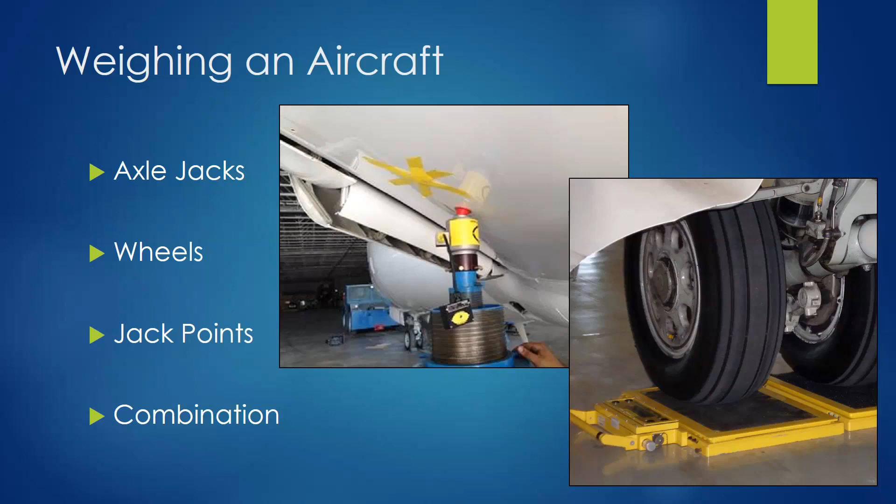So how do we do this? A very simple CG calculation is, at minimum, we have to have two points, right? We have to have two different points in order to calculate the center of gravity between those two points - hopefully it's between the two points. So we have a minimum of two scales on aircraft because they tend to be, viewed from above, fairly triangular in nature. We often have three jack points, but two of them are in line with each other. The two wing points are almost always in line with one another, and so left-hand and right-hand main landing gear or wings make up the rear point.

The nose, which can be fuselage or nose landing gear - or on some aircraft, instead of the nose, they have a tail-heavy setup where you put the third scale onto the tail. The aircraft has to be level so that weight is spread evenly, because the idea is that the plane should be pretty much level in flight.

To find our total weight, that's simple - we just add them together. So here, if we had two scales, a nose or front scale and say a wing scale or main landing gear scale, we have 650 pounds total. So total weight is just adding the scales together. Most of your scales, like the one we saw, or the one we'll use in class, you plug three scales in simultaneously and it gives you the weight on this scale, the weight on the second scale, and the weight on the third scale, and then it also gives you a readout for the total - it adds them for you.

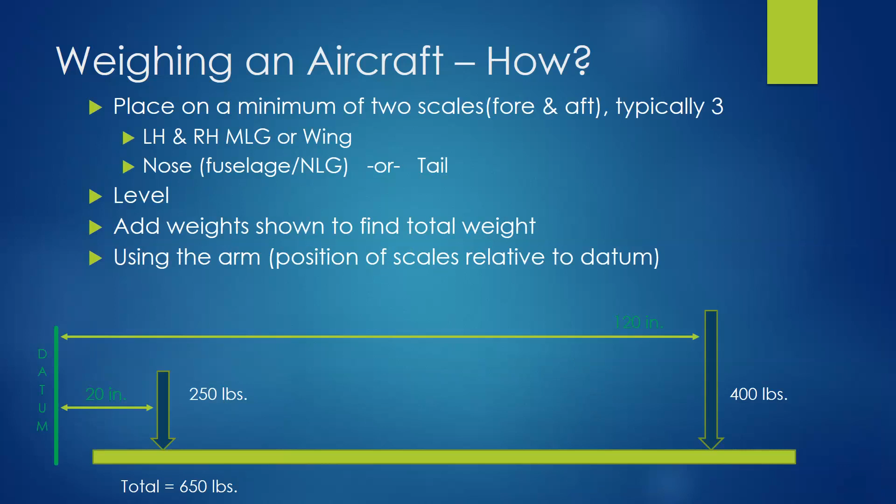Then we have to use the arm position of the scales relative to the datum. In my example here, I drew a datum, and we're going to say this front scale is 20 inches back from the datum. So is this a positive or a negative arm? Positive, because it's behind the datum. Then we'll call that main landing gear at 400 pounds, 120 inches after the datum, so also a positive arm.

And so we calculate the moment for each one. The forward one, 20 times 250, gives us 5,000 inch-pounds - pound inches. 120 times 400 gives us 48,000 pound inches.

And we combine those to get the CG. The way we do that is we add our two moments together, 5,000 plus 48,000, and we divide it by the total weight of 650, which gives us a CG of 81.5 inches.

So if we lifted this beam up at that point, in theory, it would balance. It would be a balanced teeter-totter. It's kind of like you got the big kid on one side and the little kid on the other. Normally they don't balance, but if the little kid sits further away, you could make them balance. And that's what we got going on here. That's a really big couple of kids, though.

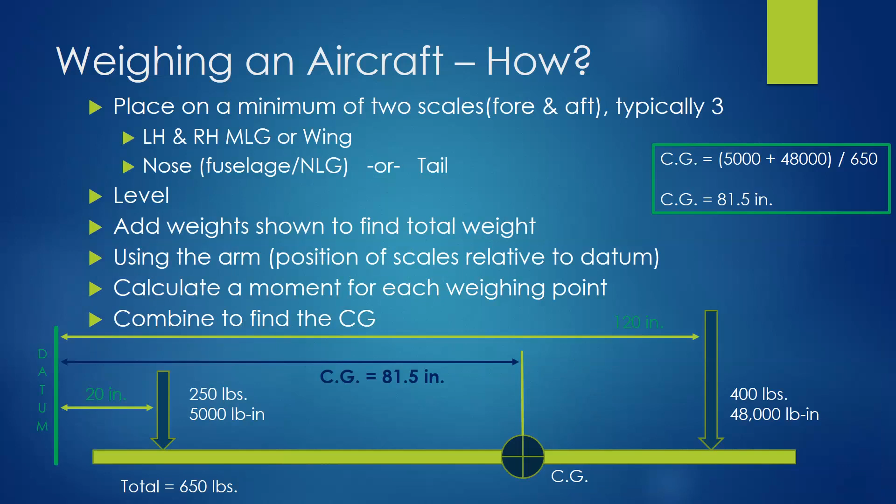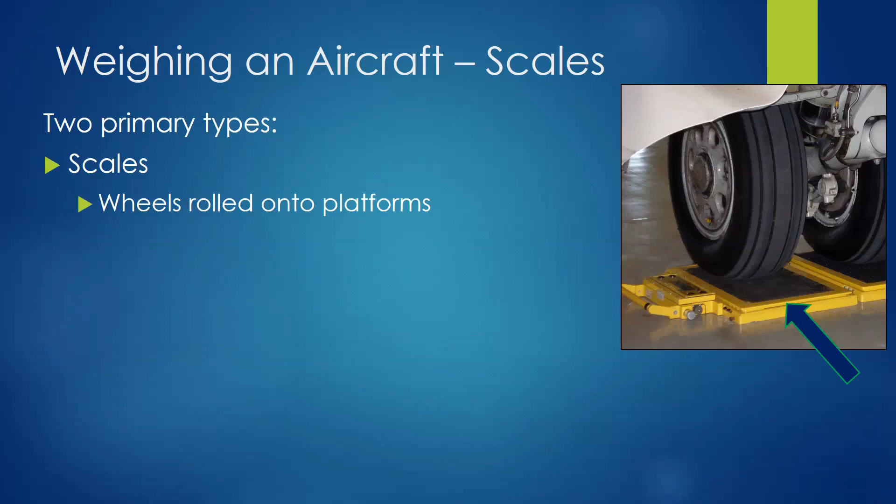So the two primary types we'll see in industry are scales, where we roll onto the platform, and load cells. Load cells are used between the top of a jack and the jack point. In this case, it's a removable jack point - you can see this red-orange piece screws into the fuselage. On our King Air, it has jack points, they're fixed. You'll see these little nubby things sticking out when you do gear stuff on it. But under normal operation, the jack just contacts that directly.

When you're weighing it, you put this load cell between the top of the jack, and these are extremely sensitive. The ones we had would go to about half a pound. When you're lifting an airplane totaling 60,000, 80,000, 100,000 pounds, a half a pound is pretty precise for one of these cells.

We have to subtract out that tare weight. We talked about it earlier when we looked at the weight and balance record and the pilot operating handbook, where we subtracted out the chocks in that case.

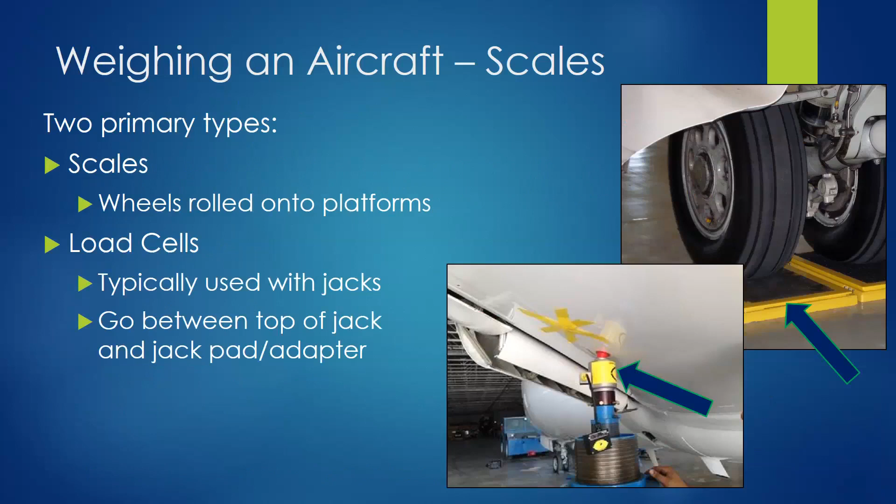But items that may have to be taken out include support equipment used during jacking, so the jack pads - in the case of this, it's that orange thing that's screwed into the side of the fuselage. You'll know how much those weigh, and you have to subtract that out.

Jacks themselves - sometimes depending on how the jack is configured, a portion of the jack weight is included. Any kind of balance weights, so is it the Baron? You have to put the tail weights on it when you're doing weight and balance, something like that. We haven't done the Baron, but there's some airplanes where you lift it at the wings, and instead of lifting the nose, you put a bunch of weight on the tail and teeter-totter it on the mains. It's kind of a goofy setup, and so you would have to subtract those balance weights.

Chocks, gear pins - when we weigh bigger airplanes, you can pin the gear in the down and lock position, and you would have to remove those. Sandbags, ballast bags, etc., so they have to be subtracted at the end, both out of the weight, and you have to go through the process of subtracting from the CG.

And it's not a straight process of CG of those, CG of the airplane minus CG of those. You cannot add or subtract CGs. You cannot add or subtract the moment arm, okay? You can add and subtract weights, you can add and subtract the moments, but you cannot add and subtract arms directly.

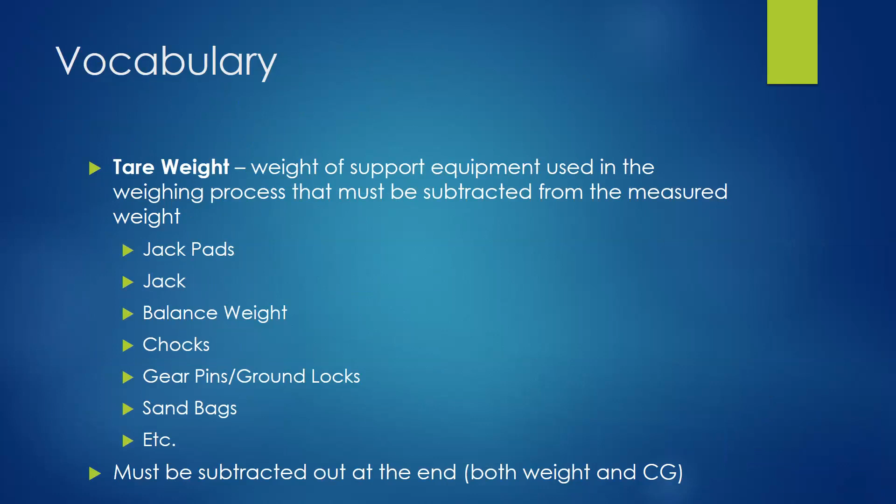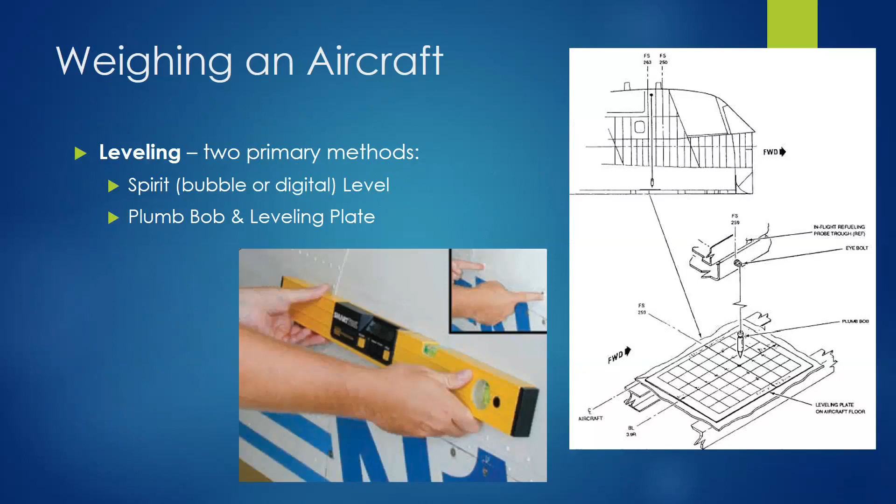The leveling - we talked about different areas, whether you use a Spirit level, which also includes your digital type level. Spirit level is a bubble or a digital level. And then plumb bobs and leveling plates like we've seen on the 727.

And then we get to that engine oil discussion - do we include it or do we not? So remember, before 1978, Civil Air Regulations Part 3, engine oil would not be included. If your engine oil is full, you can subtract it out, because typically you know the CG and you know the volume of oil, or you can drain the engine. Your choice - it's probably easier just to fill it full and subtract it out.

Newer aircraft since 1978, full oil is included. Most of the time you're going to top it off to the full mark, and that's where you're going to have it when you do your weight and balance. If for some reason you have a totally empty engine, then you would need to add that weight of the oil back in, and you would need to make the calculations to adjust the CG based on that oil being added back in.

There's additional information in AC 43.13-1B, Chapter 10, and in the TCDS. So other fluids - fuel is only the residual fuels included. Okay, that's unusable, undrainable fuel.

What if there's fuel on board the aircraft? What do you do?

Do you know exactly where the CG and the weight of the fuel is? One option is to drain it. What's another potential option? Burn it. Go out and run. What else?

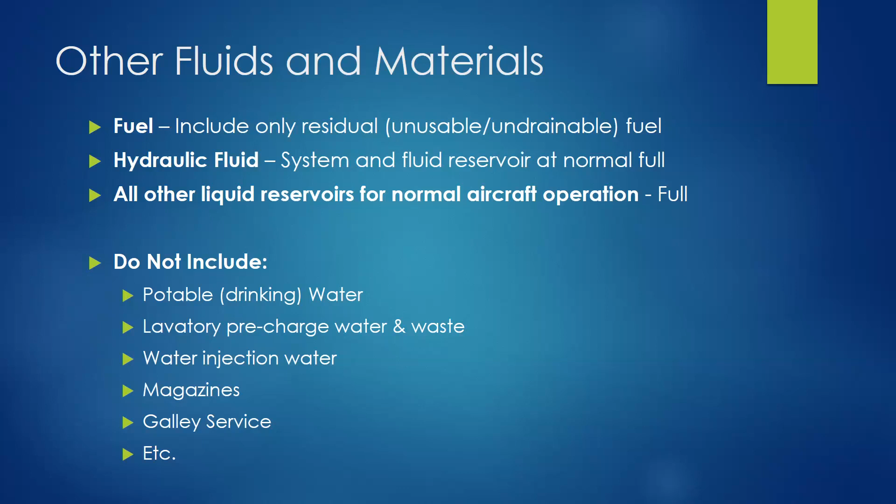They are considered operational equipment, safety equipment that has to be on the aircraft. Now you go in and you find like 5 in this pocket, 1 in that pocket, and none in this entire row because for some reason people treat them like trading cards and hand them around. Most people don't even look at them, but yet they move. Passengers are a pain if you haven't figured it out yet—they do dumb things.

So back to our 182. This one was certified in 1971. It was built in 1974. That means it was prior to 1978, so we would treat this as a Car 3 aircraft.

So what do we have to do with oil when we do weight and balance on our 182? You need to drain it, or you have to subtract it—drain or subtract, it's not part of your empty weight. The other thing is this aircraft has 30 pounds of unusable fuel. We do include unusable fuel. That's that low spot in the bottom of the tank where we can't pull the fuel from. That is included.

So if you have a totally dry tank, you would have to add that back in. Most of the time, if you empty the tank, you don't have a way to get that out unless you pick the airplane up and dump it out, or you sit there and suck it out with a fluid transfer. So the certificate of empty weight must include unusable fuel, 30 pounds at 46 inches—they give you a weight and an arm.

I should go back. In this case, they say undrainable oil of 0. Now that's it—any undrainable oil would be included in the weight. But on this aircraft, you can drain all the oil, and so you would remove the full weight of the oil. They give you that information elsewhere, further down. So we do include our unusable fuel.

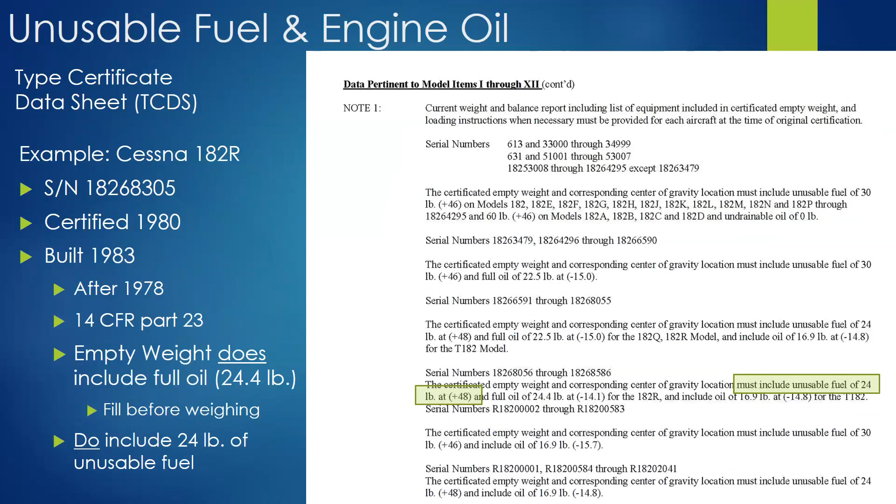So how do we calculate this? Once we have these weights, we have to do something with them. Weights we can add and subtract. To get the CG, there's two primary methods. I'm partial to the second method, but you draw your own conclusion as we go along.

So the first is empty weight CG formulas, and these are fun because there's different formulas for different aircraft styles. There's 4 of them. Or we can use a table. For the table, it doesn't matter what style aircraft you're using.

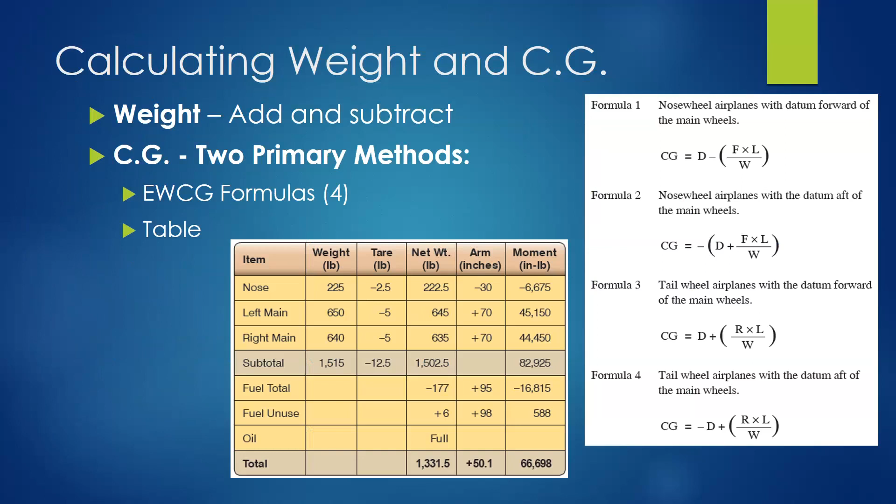So the 4 formulas for our 4 cases: a nose wheel tricycle gear aircraft can have a datum forward of the main wheels, or it can have a datum aft of the main wheels. And a tail wheel, tail dragger aircraft — it's a conventional gear aircraft, even though we don't see them as often today. They were the first type of airplanes. Datum forward of the main wheels, datum aft, okay? So those are the 4.

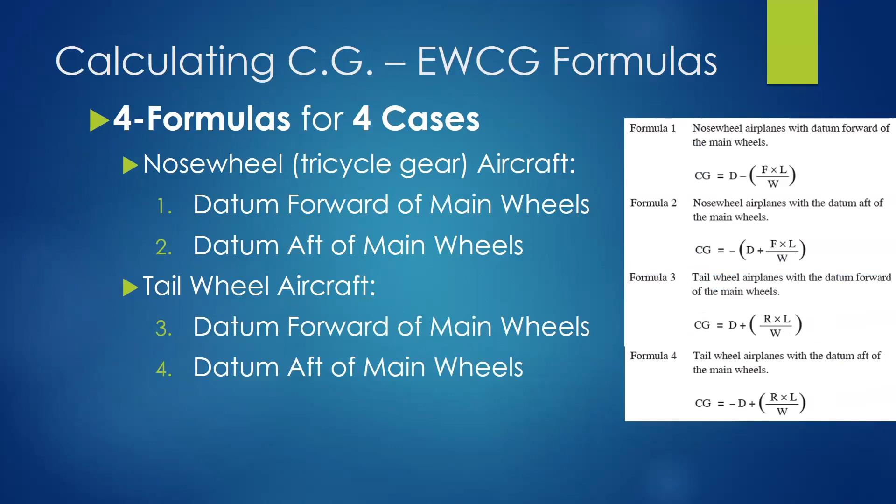You don't need to, you can write your equations down. This is directly copied from a page out of the 4313, chapter 10. 4313, 1B, chapter 10 covers weight and balance. So if you have your 4313, it's in there. If you have your mechanics handbook, these equations are in there.

The variables: CG, that's what we're trying to figure out. Positive is behind the datum, negative is in front of it. W is the total weight. D is the horizontal distance, and this is where people really get screwed up — the horizontal distance from the datum to a main wheel weighing point. Not an arm, always positive.

Even if the main wheels, like in a tail dragger conventional gear, are in front of the datum, when you're making that measurement it would be a negative arm. It is a positive distance D. So don't let that screw you up. The arm is positive or negative. All the rest of your measurements are not — you're purely working with positive numbers.

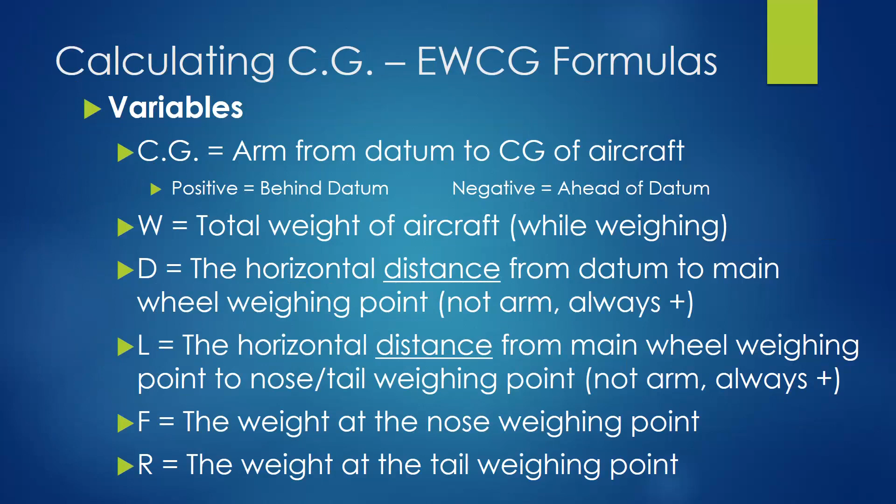L is the distance from the main wheels to the nose wheel or to the tail wheel, depending on the aircraft type. Again, it is always positive — it is not an arm, it is purely the distance between the 2 sets of wheels. F is the weight at the nose weighing point, if it's a tricycle gear aircraft. R is the weight of the tail weighing point in a conventional tail dragger aircraft.

So if we apply them, here is that first one. Here we have a nose wheel aircraft, datum aft of the main wheel, and I've got what our different variables are. But what we're going to do is perform a quick calculation to figure out what the CG of this aircraft is, and as part of that we're going to draw a sketch of it, because you're going to do this on your lab.

So when I say draw a sketch of it — here's the nose wheel, here's the main wheel, I hear the giggling, here is the datum.

Okay, can you guys see that okay? Is that... God, yeah, these boards are ridiculous.

We have our D, so our nose landing gear is 375 pounds. Our main landing gear is 1,050 plus 1,025, okay, or 2,075, okay?

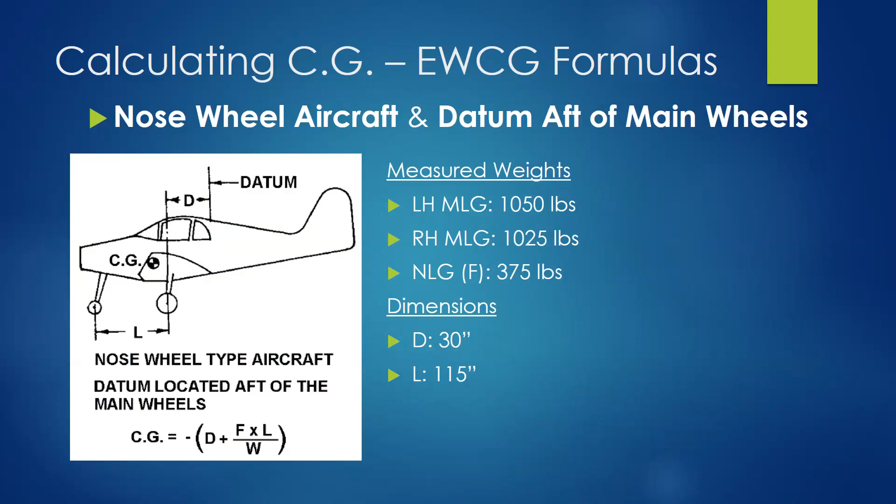And if we plug all this in and we draw a sketch, it looks something like this. So here's our datum on the right behind the main landing gear, 30 inches behind D. The L is still 115 between them. Now you can see when we put it all together, our CG is negative 47.6.

Remember, because this has that negative in front of it, and these are all positive numbers inside the parentheses, we end up with a negative arm. And that makes sense, right? Our datum's here, our CG typically has to be between our wheels. If you do the calculations and your CG falls outside of the area between the two wheels, that should be a big red flag.

What would happen if the CG was behind the mains on a tricycle gear? Our tail would smash into the ground, right? It would teeter-totter into the ground. These are posted on e-learning exactly like this, if you don't want to.

Okay, so if it was in front of the nose landing gear, what would happen? Maybe it would tip up, but probably not tip up, but it'd be really hard to get that nose off the ground. Plane would be going down the runway doing this. Right? Bounce with me, bounce with me. Right?

I'm really cool, my kids think so. My 10-year-old won't even, she's like, drop me off way back there, Dad. But I'm going to take you to the front door of your school. No, drop me off back here. What's that? Except that's my wife, I drive the Explorer with the rusty liftgate. She didn't want that. I'm just waiting for truck prices to come back down, but I feel like they're not going to.

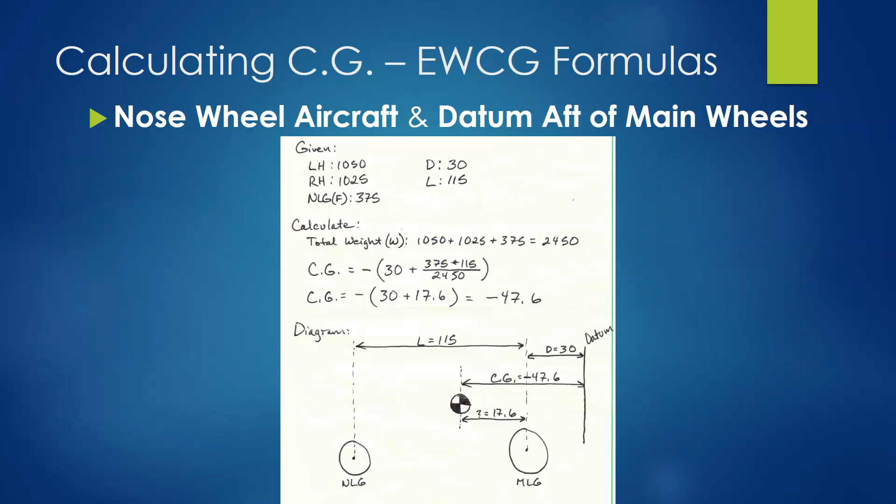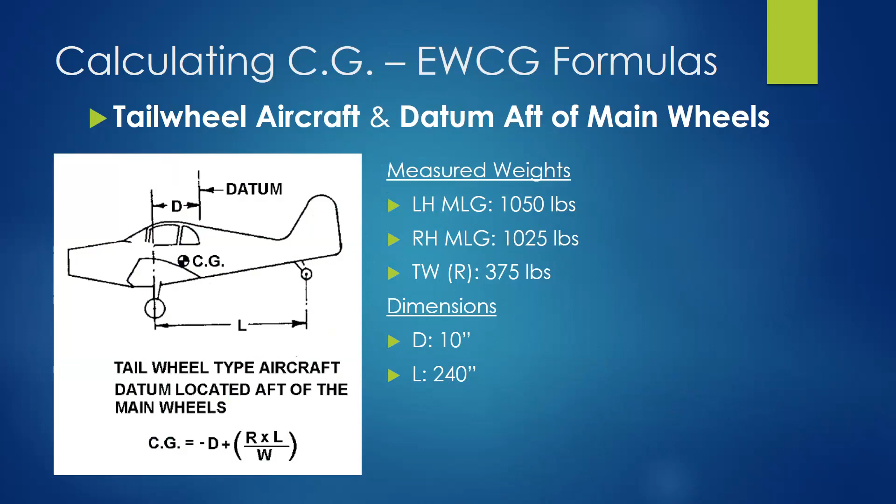Here is the same aircraft now, but the datum is behind the mains. If you were to overlay these on top of one another, use the same weights, the same distances here - the length is the same, I just moved the datum, so that's got a different distance. It's 10 inches now behind the main wheels. If you overlay these, they are basically the same aircraft with the datum in two different locations, and they will end up in the same spot.

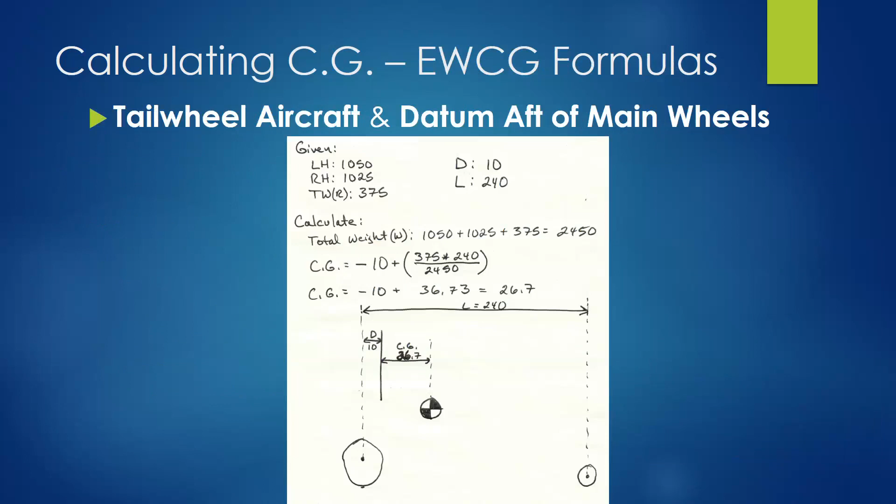So, who likes knowing 4 different equations for 4 different aircraft types? You have to learn this method, but it's not my favorite. Here's what I prefer - I like the table method. That's the next thing we've got. So the table method, gear type, and datum location are basically irrelevant. But there is a big caveat to this one that students always get screwed up on.

That is, you can add the weights together, you can add the moments together, but you can never add the arms together. Stay with me - you can add the weights, you can add the moments, you cannot add the arms. Thank you. Nobody add the arms. I guarantee somebody will - someone will do it on the homework, someone will do it on the final exam. Yes, I said final exam, there is one for this class.

We'll show how to do that. Okay, so you need to know the weights and the weighing points - again, it could be gear, it could be jack points, it doesn't matter as long as we know what the weights are and how far they are from the datum, the arms. Arm is the distance from the datum to the weight point. Again, positive is behind the datum, negative is ahead of the datum in relation to the aircraft.

So if our datum is at the firewall, what kind of things would be positive? What kind of loads? The cabin, items in the cabin, main landing gear probably would be, the flaps would be. What's carried behind there that's variable - the people, the fuel, baggage, okay? This is like a Cessna and that kind of thing. The firewalls on the airplanes I worked on were way at the back - ours was out in front of the nose.

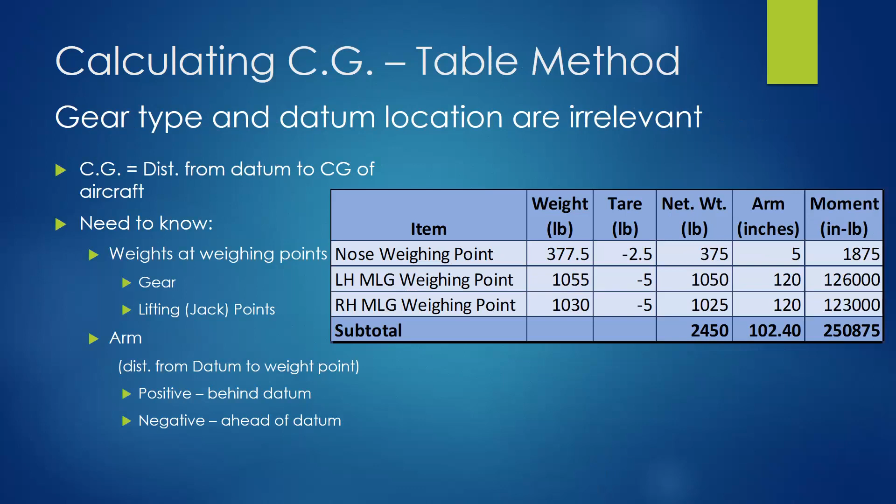We can take our table and now we can add additional items to it to track modification repair. You can see how this looks a lot like the empty weight calculation in the pilot operating handbook, and now we're adding modification data to it. So Western over at the engineering college used to have, I don't know if they still do, they had a

modified Cessna 172. It was experimental. And what they'd done with it, they used it for the aeronautical engineering program, which Western has a really good aeronautical engineering program. If you think about switching to engineering, it's actually very highly accredited, by the way. But they removed the rear bench seat,

and so you would take the weight, and where did I get this weight and arm for my rear bench seat? Where'd that come from? The equipment list - comprehensive equipment list, very good. That would be in the pilot operating handbook or the aircraft flight manual. And they installed a test equipment rack.

It's experimental. They had to do their own figuring out of that thing, I'm sure. I'm sure they were real precise on it too, based on the operations I saw going on with that airplane. So when I saw them operating it, they were looking at icing. They basically would build fake ice shapes and attach them to the wing and then go fly the airplane. And they'd have yarn stuck all over it so they could see the yarn lifting up when it started to stall in different areas. Nothing like attaching unknown shapes to your wing and going and flying the airplane and stalling it, right?

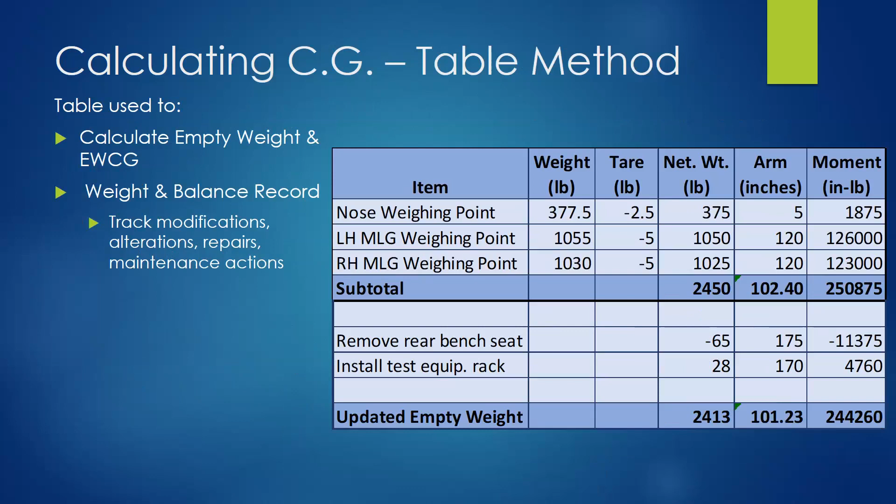They would then do additional calculations to load the airplane for flight. So this is what the pilots do. This is the next step, and they do the exact same thing. Here they've got their different fuel. They add in unusable or take out unusable fuel because we include unusable fuel, right? But then they're going to add back in full fuel, which includes adding that unusable fuel back in. It seems kind of counterintuitive, but they have us keep unusable fuel in, and then the pilots have to subtract it out, and then they add in full fuel, for instance.

The pilot, baggage. Oh, now they've added some test equipment in our rack here. Slot in maybe at that time, that 47 pounds is probably like a VCR, and maybe if it was 1980s era, it'd be a VCR, and that'd be it.

So there's the flight load, the full weight. This is where it's important that we get our empty weight correct, because now they're going to take this plane out and fly, and we don't want to kill anybody.

They can figure out their moment, and they can figure out where their new CG is. You can see it's moved back a little bit. That makes sense, because everything they've added here, for the most part, fuel, that's behind the firewall. The pilot is behind the firewall, baggage is behind the firewall, the test equipment, right? That all added to it, so it moved our CG further back. But we want to make sure it's not so far back that the airplane is going to want to do one of these, or that it'll go into a spin and they won't be able to recover.

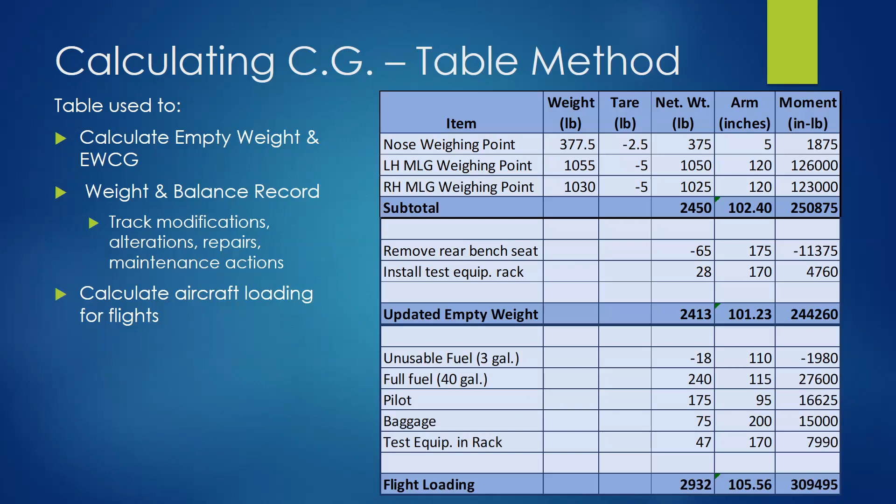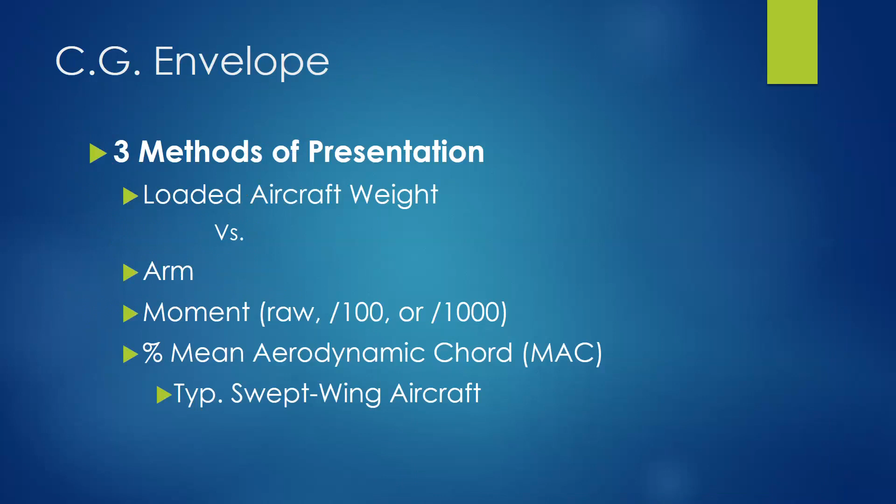So they take that, and now we have to compare that against something called the CG envelope. They're going to have a table that looks like this, which is the loaded weight. There's two versions. One can be loaded versus the CG, so the CG arm. So here's our example. If they had their loaded weight, in this case, of 2,000 pounds, and our loaded CG, in this case, of 44 inches, you can see where our star ends up.

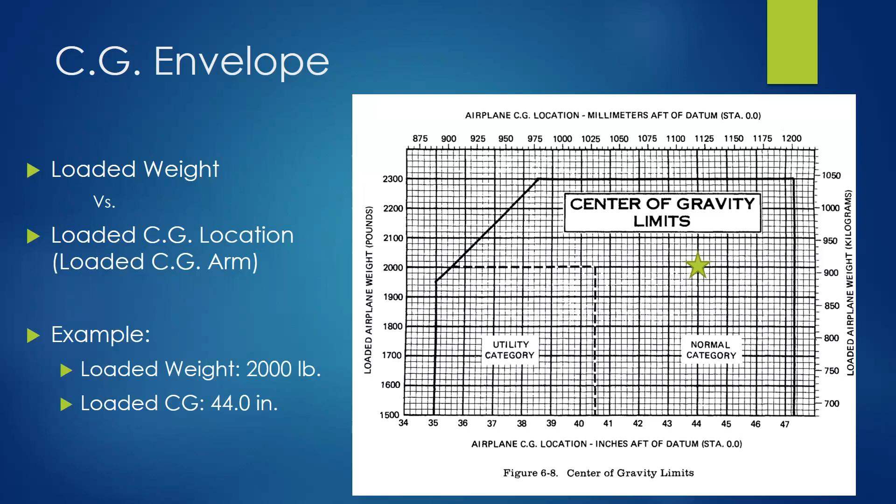But earlier I mentioned there's a third way. So it falls in the normal category.

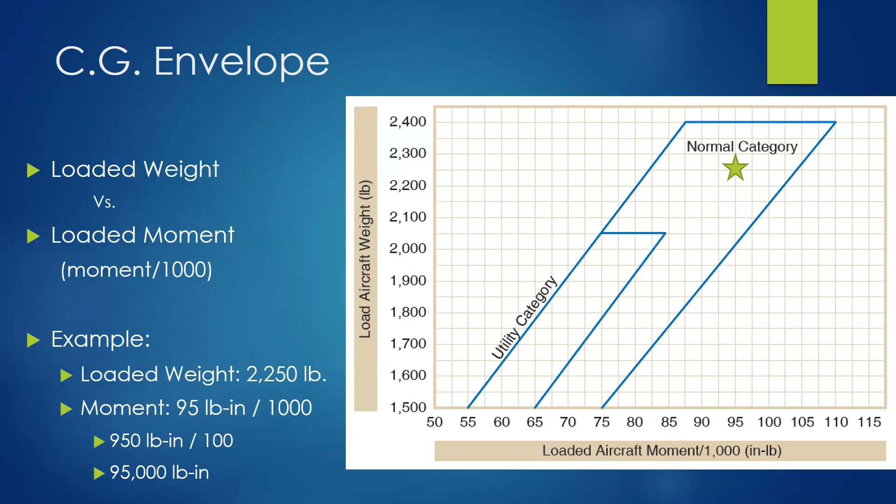Show of hands, who knows what mean aerodynamic chord is? That's about what I thought. I never actually figured it out until I came here to teach, and I went back and thought I should really be able to explain what this is. I mean, I knew how to look up the number and how to put it in, but I never...

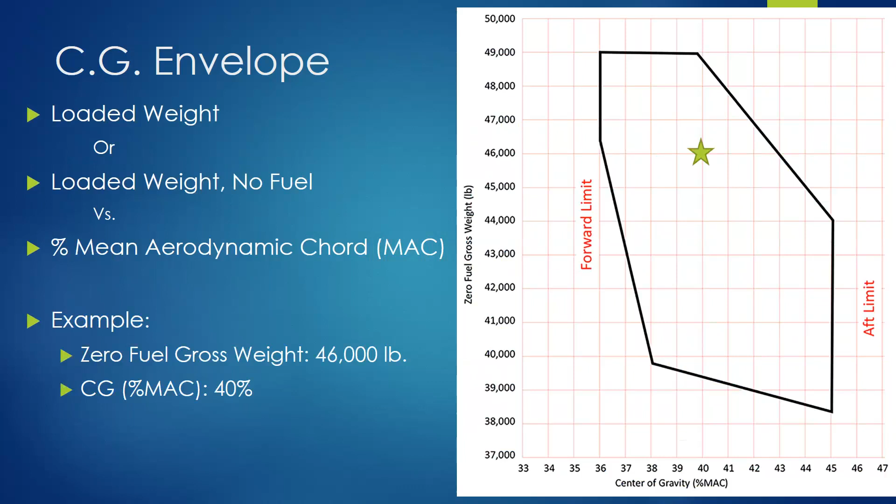And I talked about why fuel is not included. We want to be able to use any amount of fuel that we have. Part of the reason we have to do this is because most of your larger aircraft are swept wing. What is the key with a swept wing aircraft and fuel as it's burned during flight? What's that going to result in?

The CG is going to move forward, right? Because the fuel tanks are swept back. So as the fuel burns, it's going to move more and more inboard, which is also more and more forward. That's why we want to have a CG range that can take into account any fuel weight. Because when we start, maybe those wings are nearly full, and by the time we land, they're nearly empty.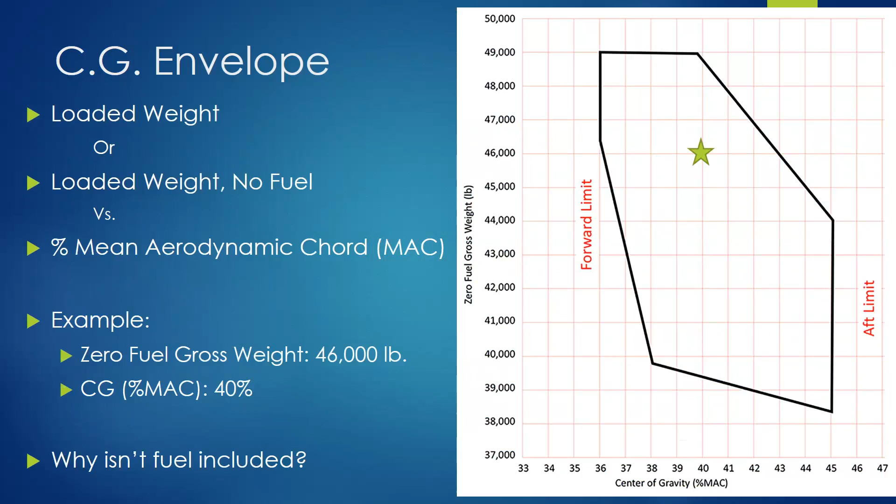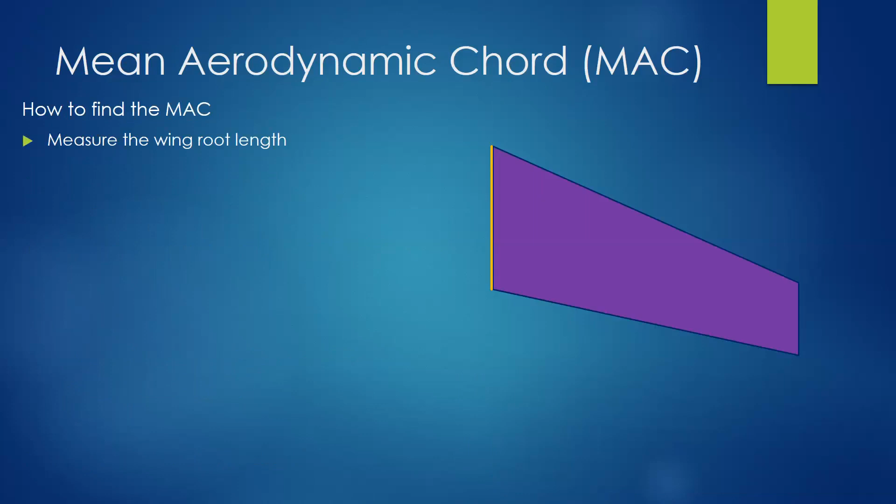And so you don't want the plane to become uncontrollable at some point during that flight. So how do we find the MAC? Here's a wing. We take the wing root length, and we add the wing root length in front of and behind the tip length. So it gives us a total MAC length at the tip.

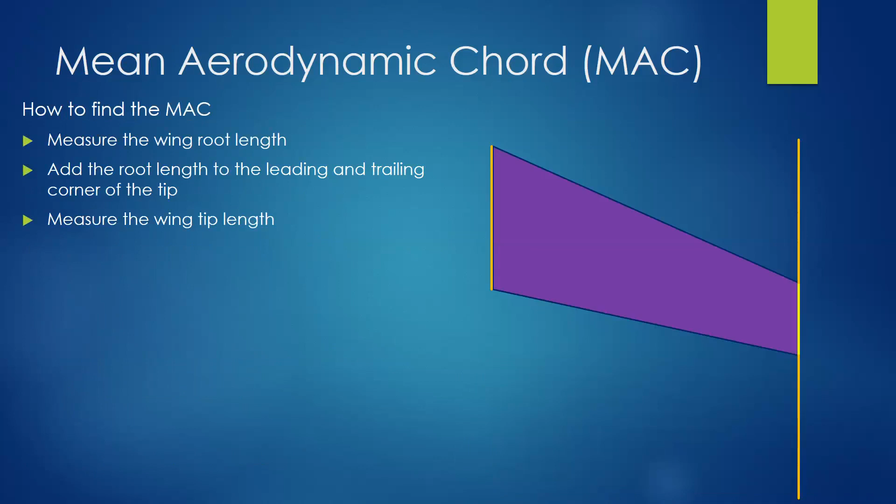We take our tip length, and we add that in front of and behind the root. Then we draw a line from the front of the inboard lines to the aft end of the outboard, the tip line. We take another line and draw it the other way. This gives us our point on the wing where we're going to measure mean aerodynamic chord, because there is not a single chord length on this wing, right? It has a wider chord at the base than it does at the tip. So the mean aerodynamic chord, the average aerodynamic chord of this wing, falls along the line that is at that point where those two lines cross.

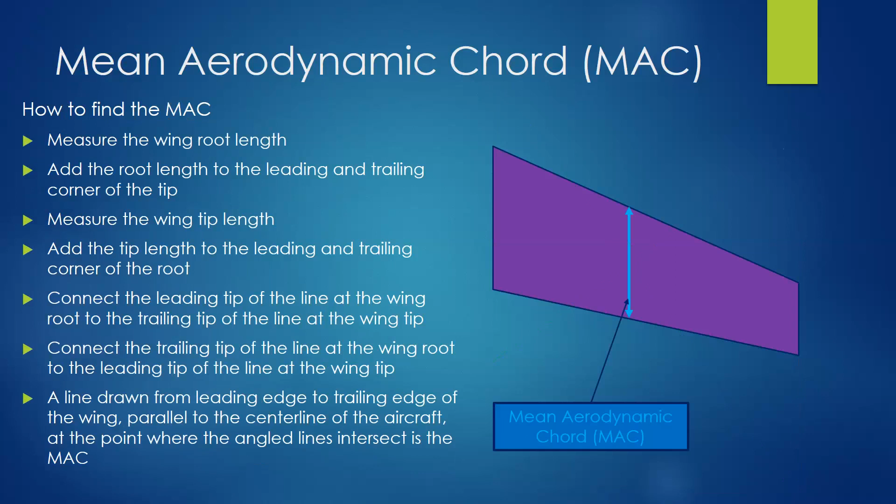So this is a very high level intro on it. So that is our point. That distance, rather than calling it the distance in inches or millimeters, we just call it a percent of that distance. 50% of that distance is halfway back. 75% is three-quarters of the way back. Okay, so here is our MAC.

So if our CG falls here, for example, this would be 25% of mean aerodynamic chord. It's the distance from the leading edge at the mean aerodynamic chord point on the wing. Do you get that all? Distance from the leading edge at the mean aerodynamic chord point on the wing. There's 50% MAC, 75% MAC.

And so that mean aerodynamic chord essentially sets kind of where your lift range is going to be on that wing. And so we want to make sure that as we're flying the airplane, as that CG moves because of fuel burn, it's actually going to move more forward as we travel, right? It's going to start further back, and as we burn fuel, it's going to be heavier forward. It's going to move forward, move forward. We want to make sure that plane's going to stay controllable, pitch controllable the whole time.

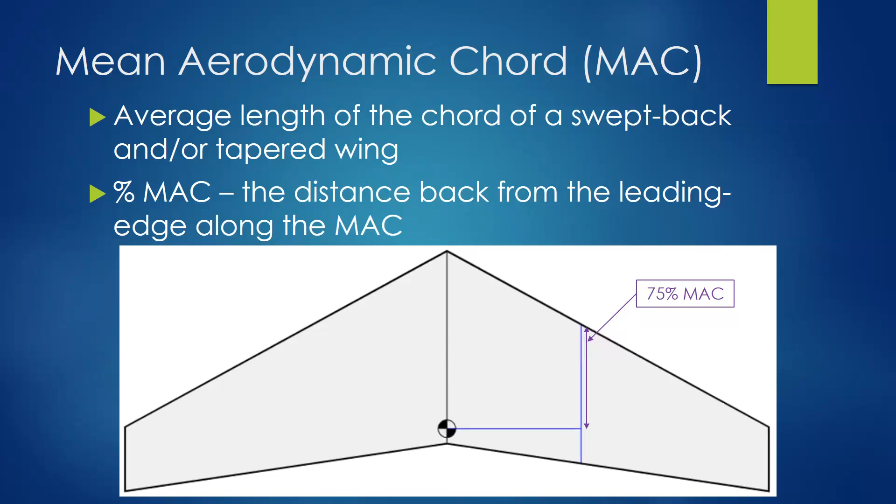You may have to retrim it. Oftentimes you'll trim the pitch trim to make up for those changes, but it's still going to maintain controllability. Okay, that is hopefully everything you need to know for now about weight and balance.